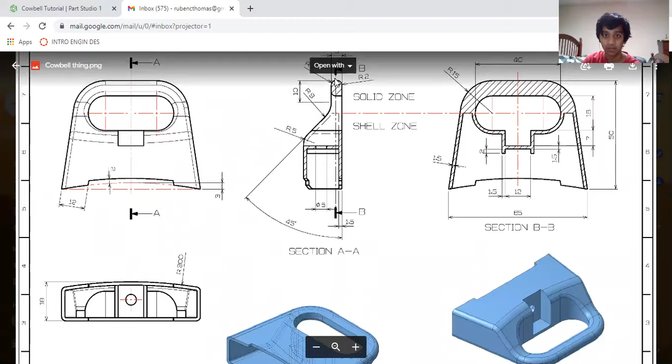To start off, we're going to be making a solid block out of this side profile over here. So if you open up Onshape, go to the right profile, we'll begin by sketching this out. I'm going to create a new sketch on the right plane and figure out what we know for now.

This height isn't yet defined, but we can start with what we do know. We have this 5 long top, this 10 long stretch down, so we can at least start with that. Let's create a 5 long stretch, 10 long stretch. Zoom out because this is big. I'm going to just constrain this for now by using just this point on the origin. So now we have that.

We're not going to worry about this little curve here because we'll do that at the end when we're filleting everything. Next, we have this curve that shows with the radius of 9.

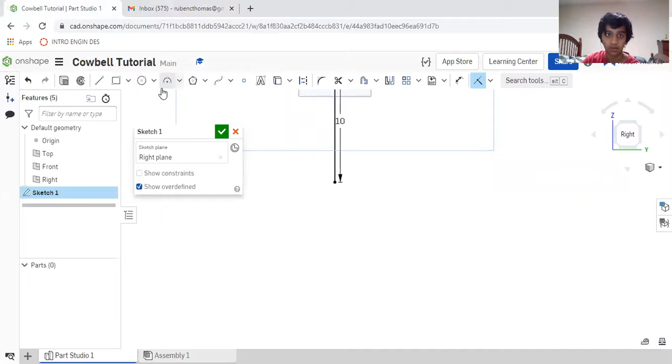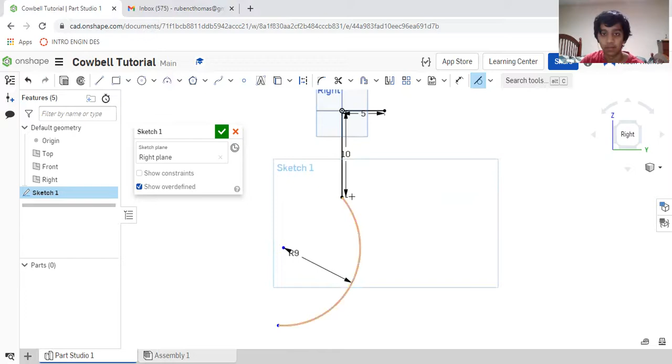We can start to figure that out by going to a curve using a center point arc. That's not what we do, just kidding. Using a 3-point arc, creating just a curve that we can click and define with radius 9 - was it 9? Yeah, 9. Then to continue constraining this, we can set this curve tangent to this.

And we have a curve. Now we just don't know where this endpoint is. After that curve, we have this radius 5 curve going down. But we're also going to ignore that for now because I found out that when you sketch this curve, it tends to break parts in the future steps. So we're just going to leave that at a harsh angle. So all we know is it will curve to be vertically down.

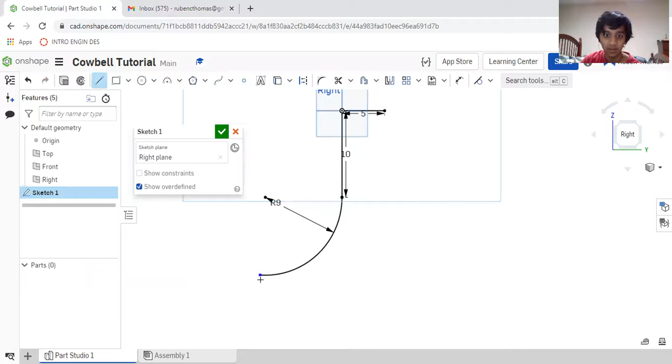Hold up, I completely forgot that there's a full-on slant over here. So we're going to ignore that for now.

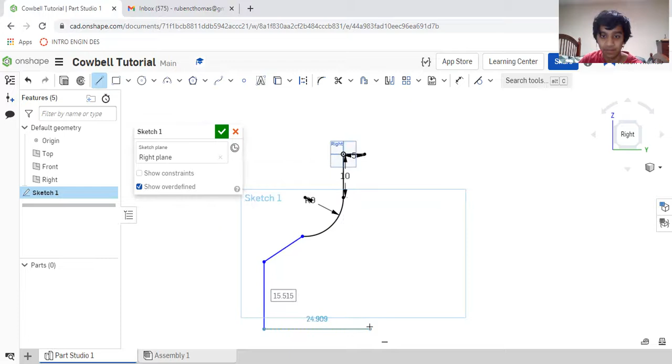So then we have a slant, then we have this, and then I'm just going to create the basic shape for right now. So this should be vertical. This obviously does not look like the side profile yet because we have to continue constraining parts.

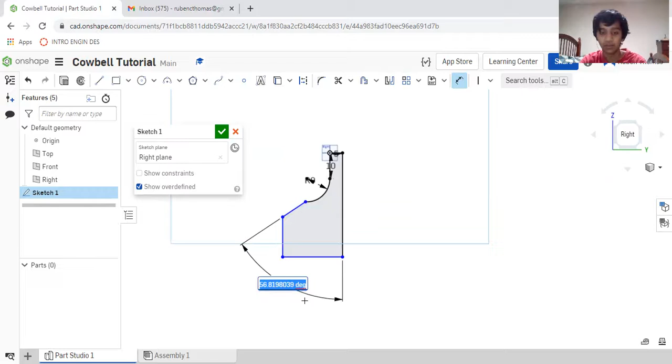So what else do we know? We know that this line is at a 45-degree angle from this line. So if you use the dimension tool between two lines that are slanted, you can create an angled constraint. So we have that for now. Again, we want to make these two tangent so it's smooth. Okay, it's looking more like how it should.

And now we just don't know some parts. We don't know how long this stretch is, don't know how long this stretch is, we don't know how long this stretch is over here. Also for this divot, we will be creating that in later steps, so you can ignore that for now.

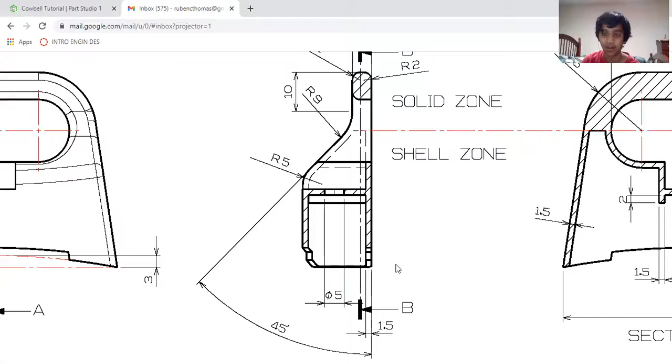Since we don't have all of our information for this little sketch over here, we can look at the other ones for more info. By looking at this one, we know the entire height of the cowbell is 50 units. And if we look at this one, we know the width of it is 18. So that 18 corresponds to this length, that 50 corresponds to this length. So if we go over here, and set this as 50, and set this as 18. As you can see, that has now constrained everything on the sketch.

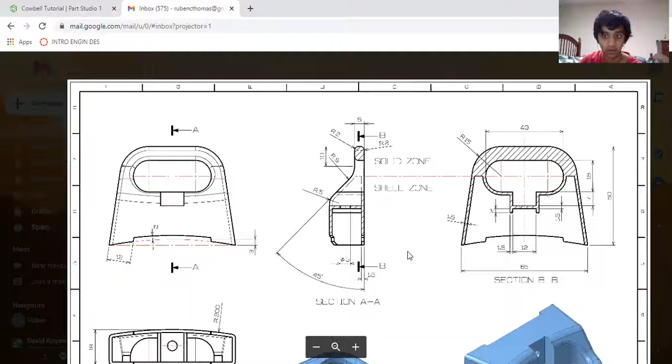That's good stuff. Okay, you can finish that sketch and move on to extruding this. So to figure out how much we want to extrude this by, go back to our drawing. Oh, I can zoom out. So over here, the entire width of this shape is going to be 65 units long, so we can just make this 65.

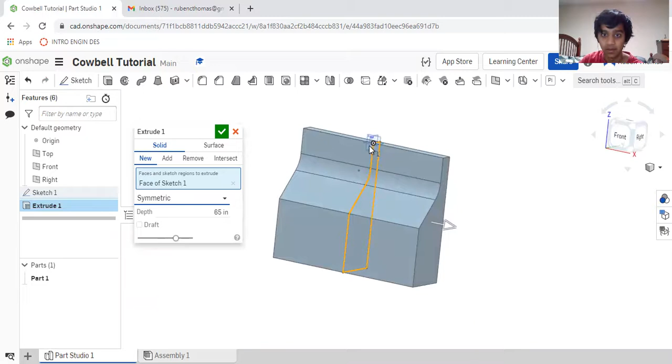Also, I don't know why, I just like to make it symmetric here because then the sketch ends up in the middle, as you can see. That can be used as a point of reference for other sketches because it'll be like a little line of symmetry going all the way down. It'll be easy to find your midpoint.

So yeah, now that we've extruded for 65 units, we can see we have this block that's starting to look like our shape, but obviously does not have nearly all the features we need. So next up, we're going to be making this the curve.

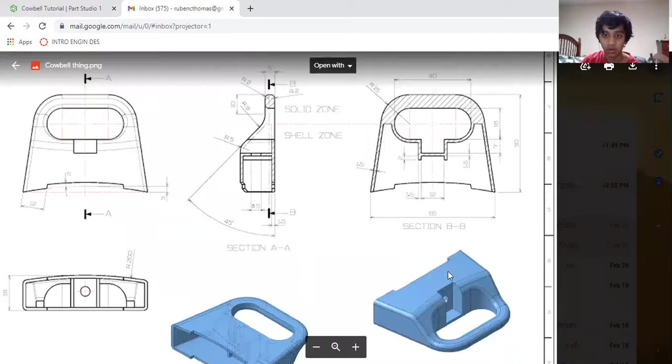So as you can see, the entire thing is slightly curved. Ours does not have that now. So we're going to do that by actually shaving off some of the excess material on the top to create that curve.

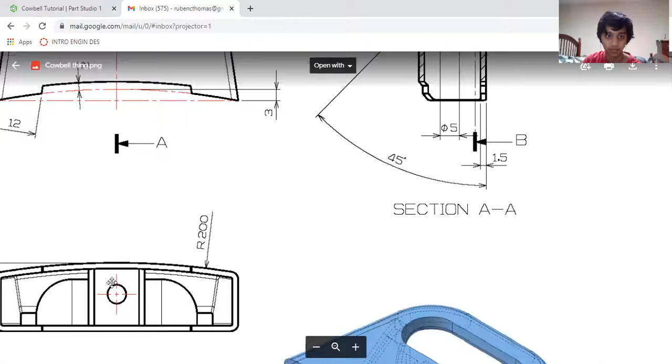So I'm going to create a new sketch and make it on the top of our shape here, the top view, so it's easier to see. And I'm going to be essentially sketching out this top curve. So I'm going to start by making a box around this entire shape.

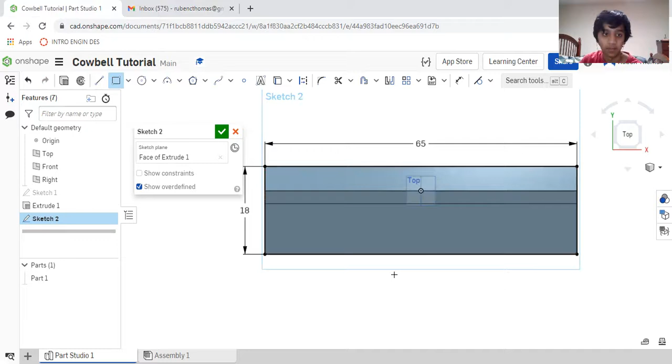What are our dimensions again? 65, 18. So this should be 65, this should be 18. And now we can see our entire thing is within this box. I'm actually also going to hide this part for now because it's not necessary.

Next, what else do we know? We know this is a radius of 200. So we can create our curve over here. We know it touches this side, and has a radius of 200.

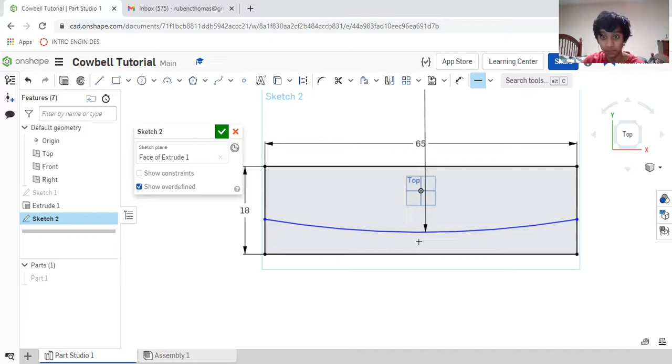We also want these points to be horizontal to each other. Lastly, we know that the furthest most point, the very end of the curve, is where the 18 is going to be. So we can make this curve tangent to this line, and that's how our curve is going to be. So that's all we have to do for now.

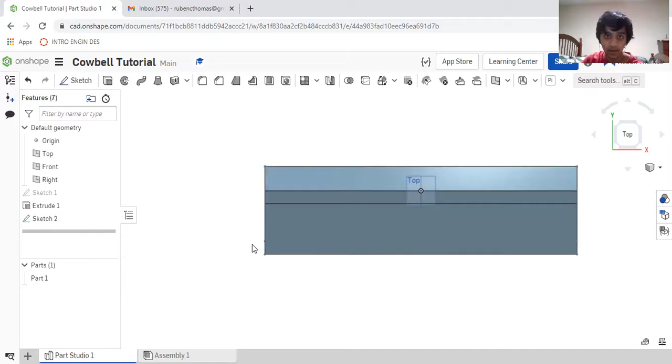So if you finish that sketch, unhide our part, and extrude, we can click on these little slivers we made, because we made that curve within the box, and go to remove. Now, if we just remove through all - oh yeah, also merge scope, click on the part. There we go. So when we remove through all, we cut off those little sections.

Our cowbell now has the curve. So now it's looking more and more like the cowbell. Good stuff. I'm going to finish that sketch.

Next, we want to make all the frontal features that we're seeing. Like we're going to make it so there's a hole for the handle. There's that little gap in the middle there, and also this bottom curve that we have going on here.

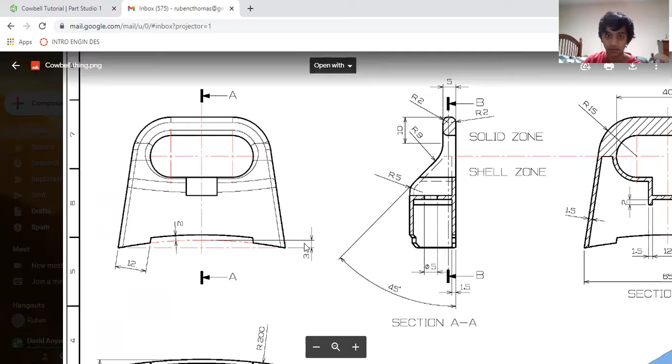So I'm going to go to the front, create a new sketch. Let's click somewhere on there. And yeah, what should we start with? Okay, so there's a good amount of info over here.

So we know that this curve, or actually hold up, this entire outside curve is going to have a radius of 15. So is this one. This length is 40. So there's a whole lot of stuff that isn't clearly defined, but when you just start out with what you can see and what you know, you'll eventually get there.

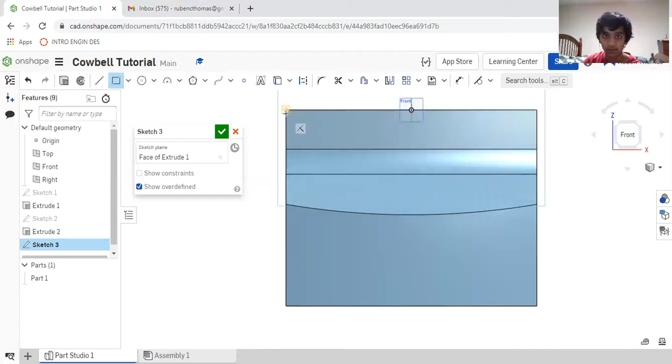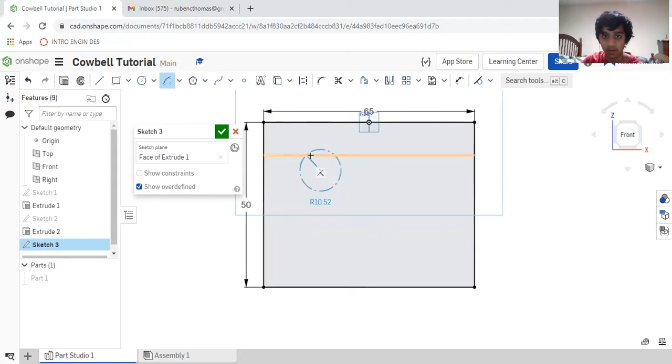Okay, so what we know is this one I'm going to use a center point arc. Okay, we know, maybe. Okay, this has a radius of 15. That looks big. 15. Okay, no, we're good.

This also will have a radius of 15. So since they're the same, we can just set them equal. And we know these are half circles.

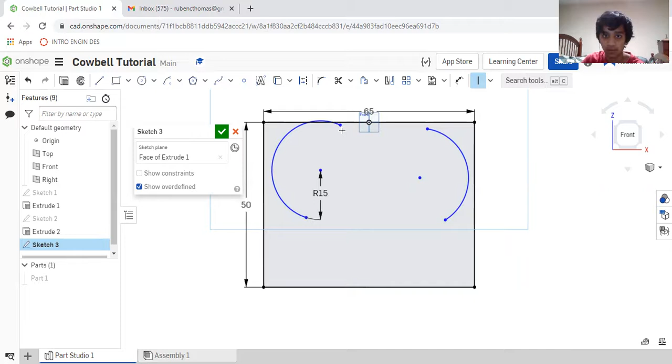So we want these 2 points to be vertical of each other. So you can use the vertical constraint key, which is V. Just click on these 2 points for both of them, and it will make them vertical. And also click on them on the center in one of them, so then the center is also in line. So now we have a nice half circle going on over here.

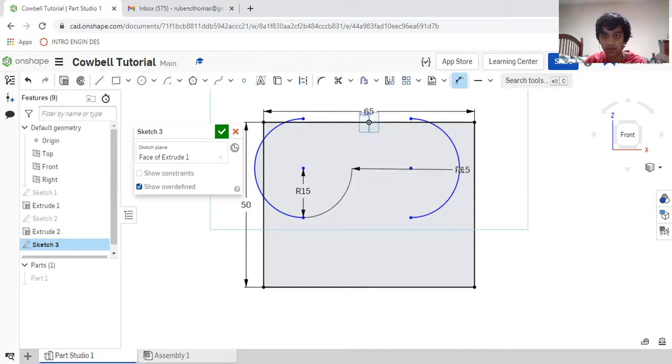What else do we know? The distance between the tips of the two circles is 40. Okay, so we also know that these circles are in line. So we can use the horizontal tool, which is the hotkey H, clicking on these two dots, and now they're in line. Then we can dimension the distance between these two to be 40.

Right, this looks - oh wait, not the dimension between these two. Sorry, ignore that. Because the 15 relates to this outer curve and this 40 relates to this inner curve.

Okay, so other than that, we want to figure out the radius of this inner curve here. And although there's not a radius marking like this one, we have this dimension of 16 that shows that the diameter of this curve is, well, 16. So from that, we can know that the radius is going to be 8.

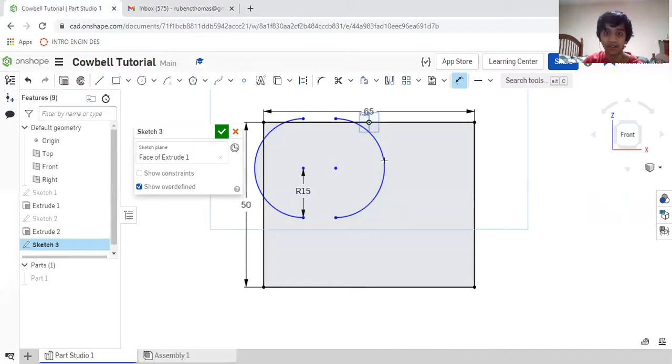So I'm going to spread these out again. Go back to the center point arc. It's going to have the same center because it's kind of concentric like that. So create another curve, dimension this one is 8.

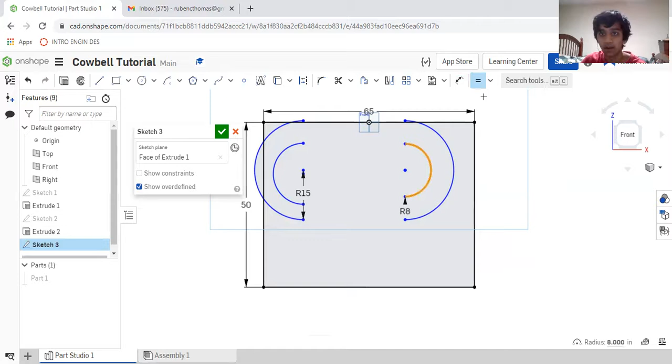Oh, the hotkey to use the equal constraint is E, by the way. So you can just tap E and click on the two things you want. Equal, then make these vertical.

Okay, and now these ones are 40 apart. There we go. Hold up. Oh, I didn't make the center of this.

Okay, so I'm going to use the coincident constraint, which is I, and make these two curves coincident. There we go, now it's all in line. Cool, so now we have this shape going. I don't know if it's fully constrained positionally yet, but we can do that a bit later.

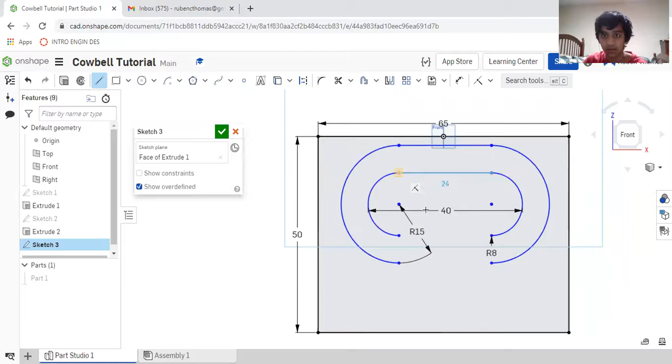Also, we know that the tops are connected, so we can just create a line going across over here. And then what else do we know? Okay, we know here at this curve, we don't know this distance yet, but we know that we have a 12 long line and then it goes 7 up.

So this one is 12, then it goes 7 up, and it connects to everything else. So again, we can just start off with what we know. You got a 12 long line, and it goes 7 up on this side. Also there's a line that's also 7, so you can set these equal to each other.

Okay, give me a second to make it so you can see the shape. And we know that all of this stuff is going to be directly in the middle of, it's going to be centered with this entire thing.

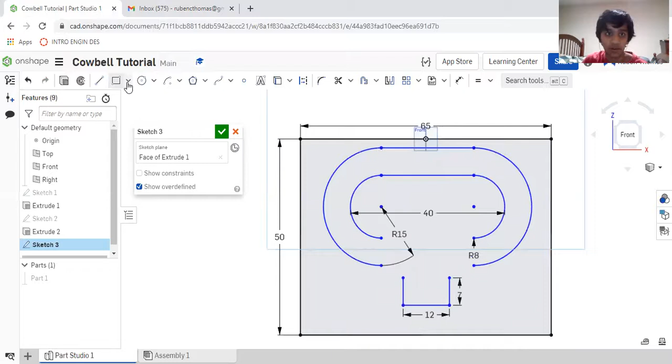So the way I like to center things usually is just create a point here. You can use the point tool and set it. You can kind of hover along this line until it creates a square. That's how you know you're making a midpoint, right?

And the way we have this set up is this origin is directly in the center of this box over here. If you want to double check, you can click on the point over the line, and you can see that.

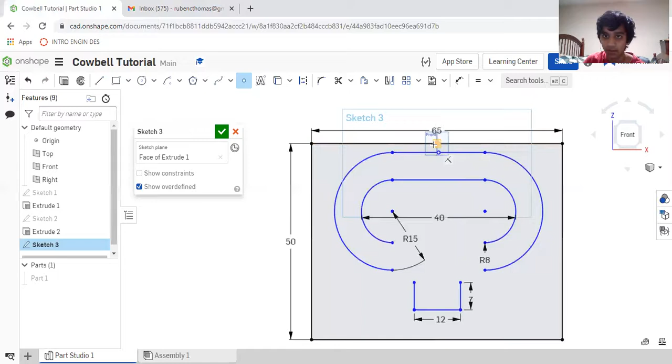Actually, here you can just click on the line here, go to the midpoint constraint, click on this dot, and click on this, and it just goes over the center. And so now we have this midpoint and this midpoint.

So the way you can center all of this is use the vertical key again, which is the hotkey V, and click that. And now this will be centered.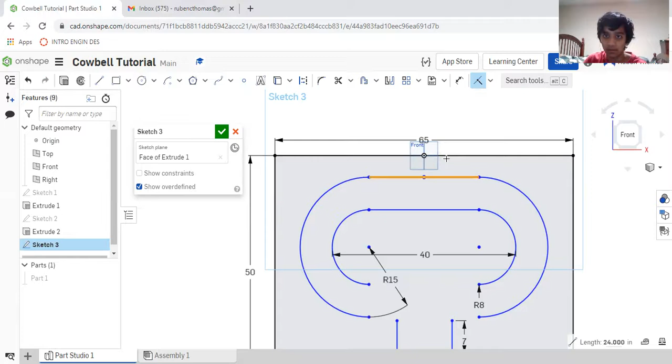We don't know how up and down. Actually, we do know, because we know that this little arch is the very top of this cowbell. So we can now just make this coincident with this. And now that's constrained. Okay.

And now we also know that this little U divot is also going to be in the center of this entire thing. So once again, I'm going to just make a point in the middle here, maybe.

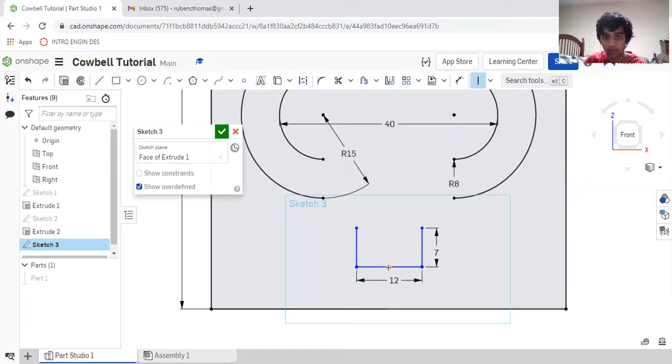Oh, there it is. Okay, let's set vertical to this, and there we go.

And so now we know that to the inner ring, there's just going to be a straight line connecting this part. So we can raise this up and create a line to this, a line to this, and make them horizontal. Now this is all constrained.

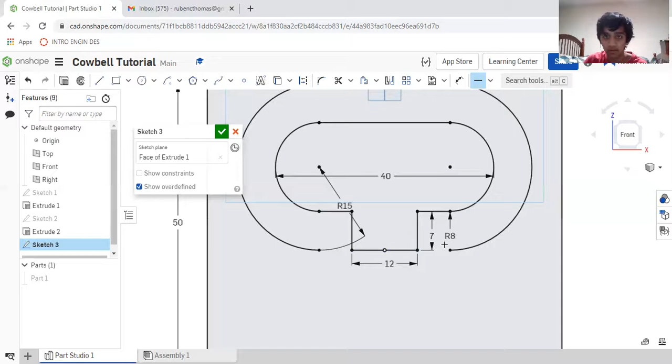Cool. Also, I just realized that this outer curve is not going to go all the way to here. As you can see, it kind of curves a bit under half, and then they'll go down. So I gotta change that actually.

I'm gonna just delete this vertical constraint, and... may have goofed a bit. Give me a second. Here, I'm gonna just delete this curve entirely. Actually, that's my bad. Here we go.

Center point arc again. Here, somewhere random. Here, radius 15. So these two equal. Okay, this is not constrained anymore.

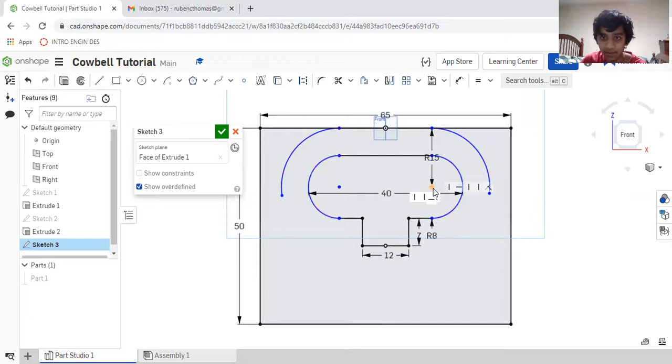That is because... why is that? Okay, also still want to make these two horizontal because they should be on the same level. Now when I drag this up and down, yeah, they should move together. Why is this not constrained though? That is my question.

Oh, I guess because when we connect it back, hopefully it'll work out. That's interesting. Okay, I'm gonna come back to that because I don't know what's happening there yet.

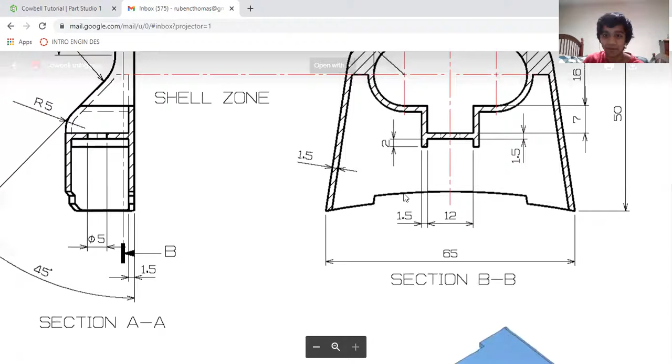But now we're gonna work on this bottom curvy part. So again, I'm gonna start with what we know. It's not a whole lot of dimensions going on here, but we do have some here.

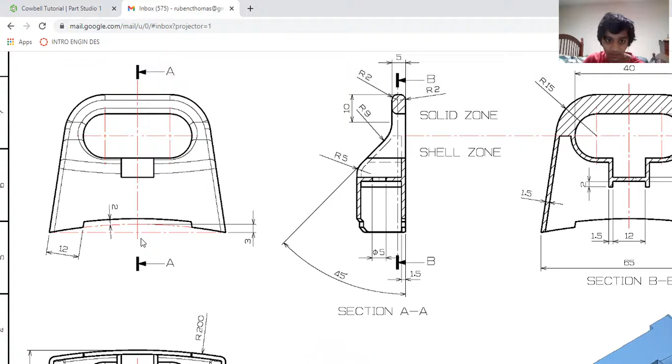So we know that this part is 12. The first arc has a 3 unit separation from the bottom, and the second arc has a 2 unit separation.

Let's go ahead and start with that. If we create a 3-point arc, we know that 2 of its points are going to go there, and it's going to be curved like that. And now we also know that the top of the arc and the base over here is going to have a distance of 3, which constrains that.

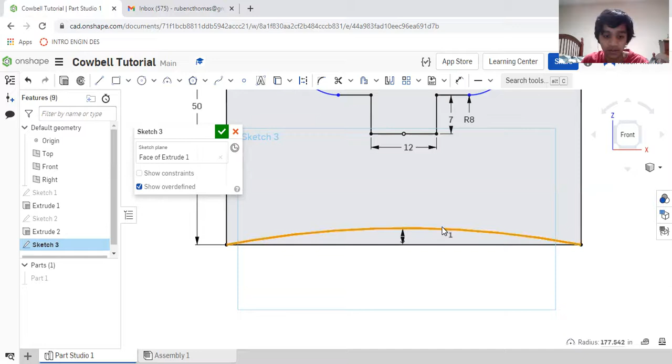But we don't want all of that arc, so we just want 12 of it. So I'm going to change this to a construction line and create another 3-point arc, making it follow this line.

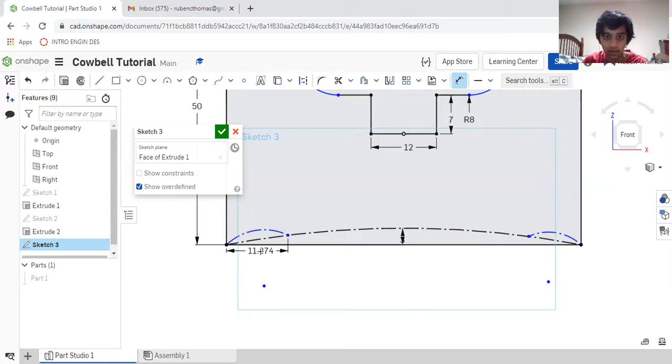I'm going to just create the lines for now. Look at that angle dimension. This should be 12. And this should follow this line.

Actually, first I'm going to make these not construction, because these are the lines we actually want. Then using the coincident key, I'm going to make sure that it follows that line. Now we can see that it goes up a bit and then has the curve again, this time 2 higher than the original curve.

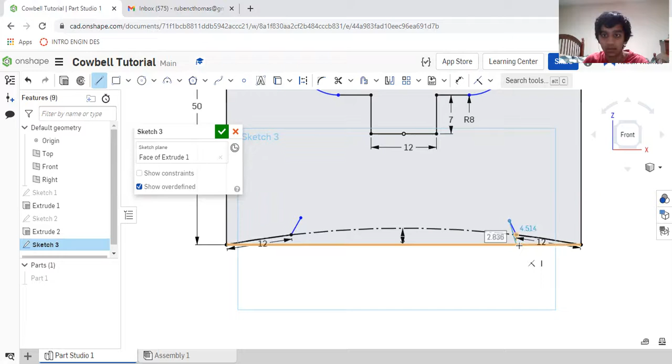So I'm going to create this little up part. You want these two to be equal to each other. And we also want these to be mirrored.

The way we're going to do that is I'm going to sketch a small vertical construction line from the center up. This does not have to be constrained. It's just a reference for the Onshape thing to find a line of symmetry.

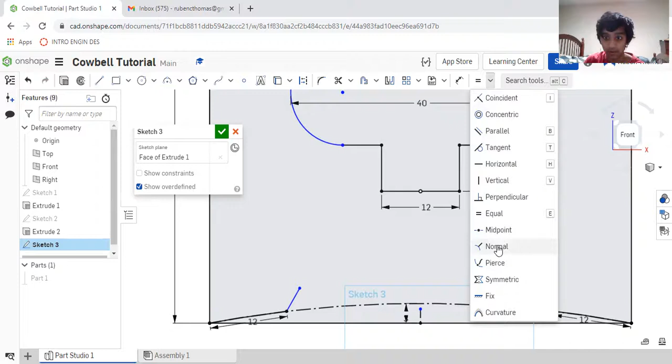And I'm going to go to mirror. Where is that? Hold up, why can't I find this? Symmetric, there we go. Click on those 2 points, this line, or not.

That's interesting. Okay, go back to symmetric. These 2 lines, saving this. No.

Okay, ignore that. We're just going to make the curve first. So if I go back to the 3-point arc, make this little arc here, and we know that this is 2 higher than this arc.

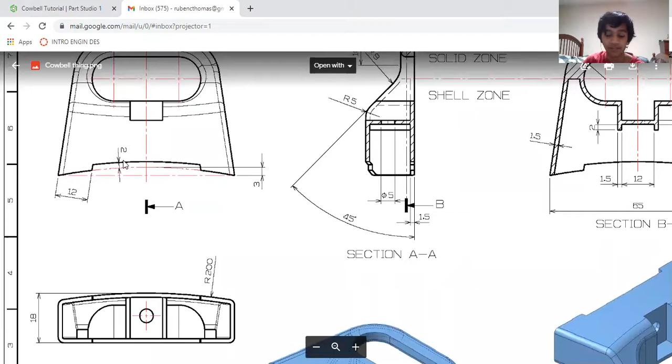This is a case where this arc technically isn't fully constrained. We don't know how long these little individual pegs are, so we can't really determine the curve or the radius of this arc. So I'm going to cheat a bit since they left it out.

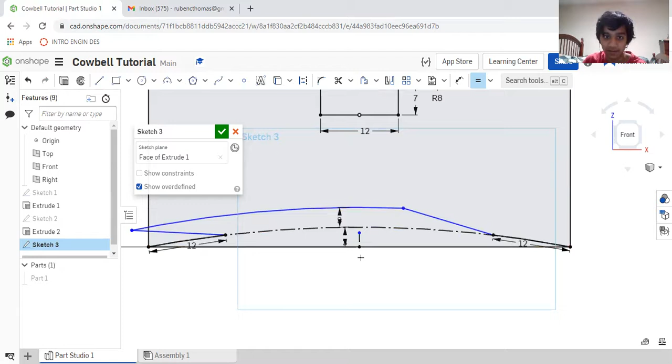We're just going to assume that this arc has the same radius as this one, so we can set these equal. Okay, that's it. And here's another tip: I can set this equal to this too. But this is why I kind of wanted to make it mirrored.

I have no idea what's happening here. Hold up, I will come back in 1 second. Okay, I'm back, sorry about that. I figured out all my problems.

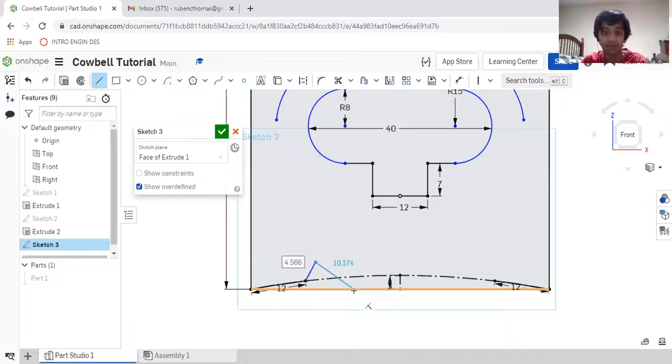So instead of using the symmetric constraint, because that was just not working, we're going to create one line and use the mirror tool, so we've got to select a mirror line. We're going to use this line we created before again, that's going to be our mirror line, and just select this line, and there we go. Now the symmetric is actually working, and they will be mirrors of each other.

So now I'm going to go ahead, no, not 3-point arc, make this curve again. Oh, there we go. Make it 2 higher than that curve. Okay, give me a second. There we go, and make this equal to that.

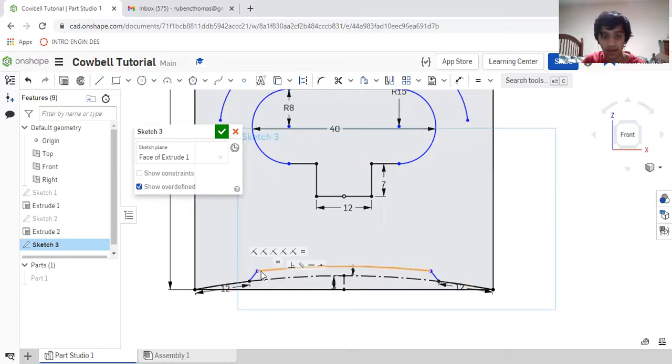Okay, now we just need to figure out how far in this goes. And also, I figured out what was wrong with this constraint. For some reason, we need to just pick a dot on this radius curve and set it vertical to this. That seems to fix everything, even though you couldn't move it before, but that works.

Okay, now moving on to figure out how tall this is.

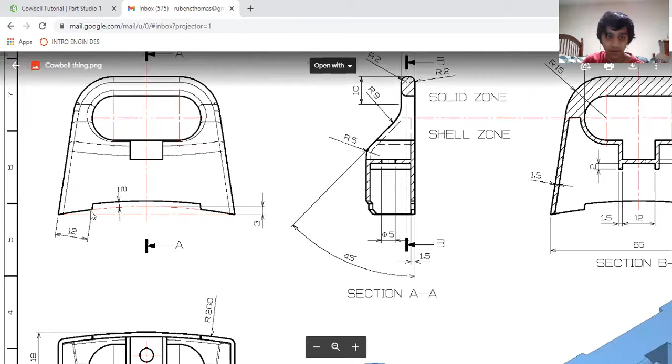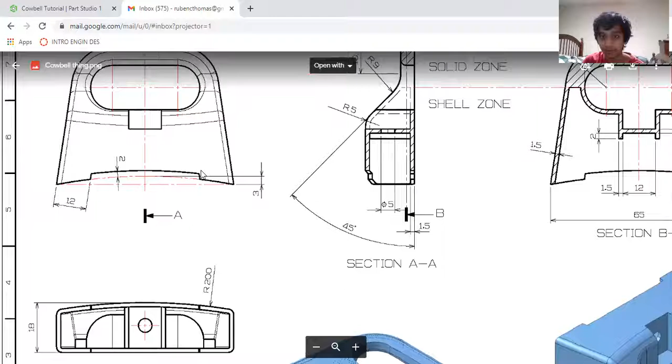All right, this one also does not have a dimension. That's right. So the way I did it is I set this line parallel to this line, because to be fair, it's not dimensioned in any of these, and that's kind of what looks best. So if you go here, you can use the parallel constraint over here and just set - oh wait, we don't have this line yet. That is a good point.

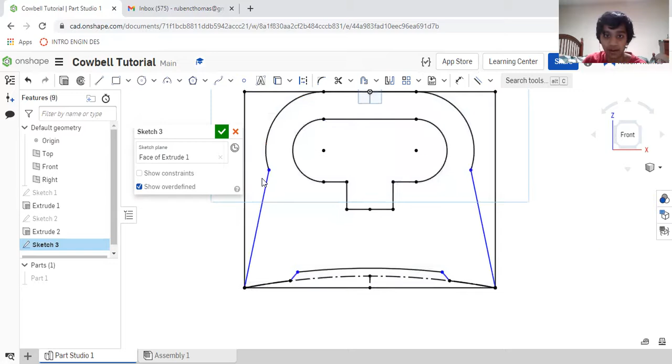So we know that this is connected to this like this, and this is connected to this like this, but we don't know how far down this goes yet. So if you go back here, we can see that the curve ends when it's directly in line with the rest of it, it's a quarter circle essentially. It ends right at this halfway part. You can tell by these center lines going all the way through.

So we can set this horizontal to this dot, since that's mirrored, that's all constrained. Now that we have this line, we can - oh wait, is that what I did? Yeah. Wait. No, that's not what I did. Sorry, this line just shows where the fill is coming in, but that's not what we're doing.

So instead, if we want to make a nice smooth curve, we're going to change this line to this curve. So now we have - there we go. Now we have the nice smooth transition. And now that we have this line, we can set this line parallel to this. Cool, and now we have our front shape.

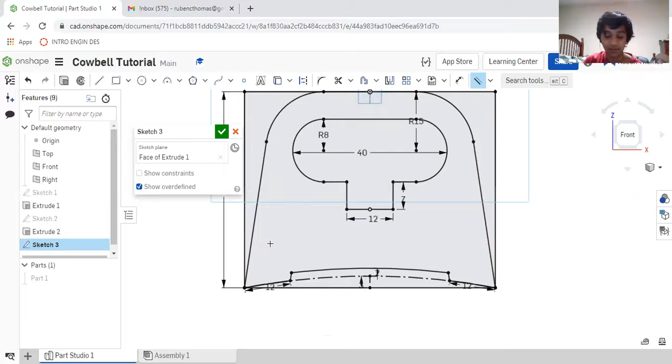It took a bit longer, but we're here. And so now that we have this sketch, we're going to use the same subtractive process that we used in the last step to get the curve.

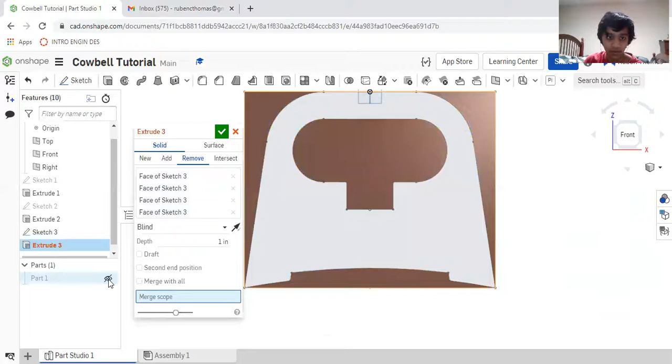So I'm going to go to extrude, and instead of clicking all the parts you created like you normally would, we're going to click on all of the parts outside of our shape, and in here. There we go, I'm going to go to remove so you can see our part again. Click on merge scope and click on the part, or just merge with all, that works too.

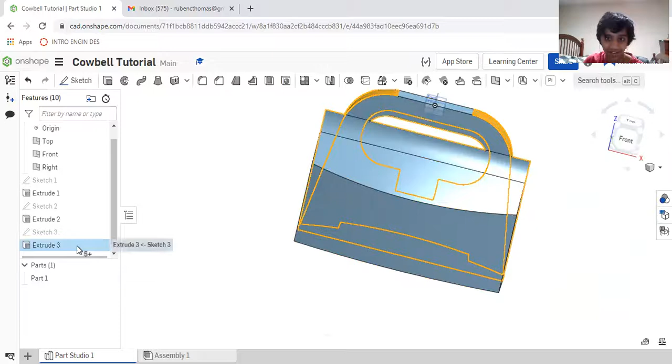And through all. There we go, I think. That was not through all. Give me a second. Other way. Oh, the sketch is in here. Okay, the sketch is kind of in between for some reason.

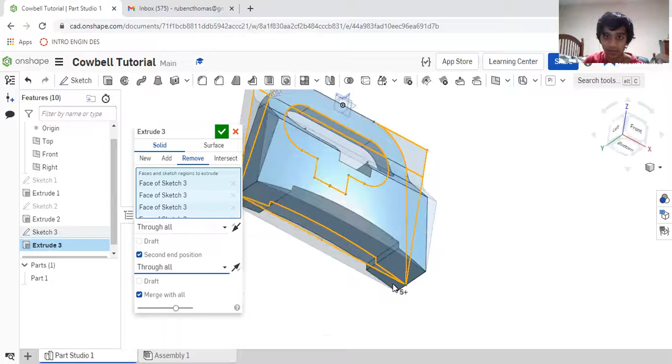This extrude - I'll just make a second end position and make that also through all. There we go, now it's cutting through both ways, and now it's looking like our shape even more. Now we got the cowbell shape, but it's got a bunch of harsh edges, which we'll fix later.

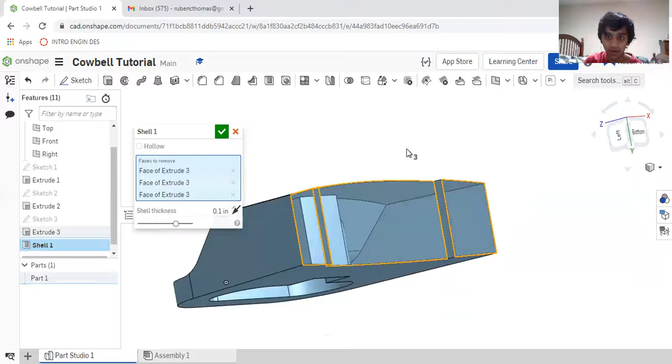For now, we're going to make the inside hollow using the shell. Where's that located again? Over here, this shell feature. So if you go here, we go to the bottom, click on all the bottom faces, and also be sure to get these little ones hanging out over here.

And we're going to set the shell thickness to, as you can see, it has a consistent thickness of 1.5 going all the way around. So we're going to set that to 1.5, and there we go. Now our cowbell is hollow, so it'll make a sound when you hit it. Always good.

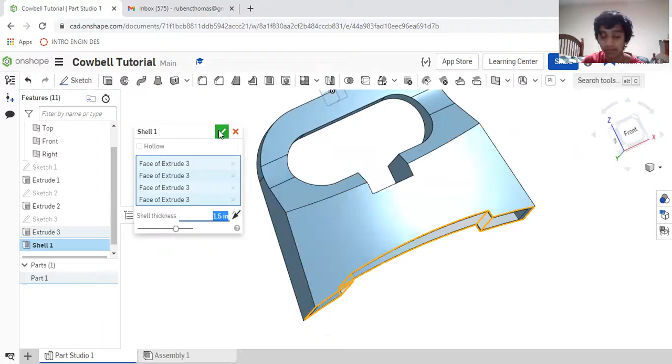Okay, obviously we're looking more and more like a cowbell. Next up, over here you can see that we have this hole that we still haven't made, and we have this little top - I'm not sure what to call it, this connector piece - that we don't have yet. And on the bottom, we have these two little divots, or kind of rails on this bottom part that we also don't have yet. So I'm going to start with

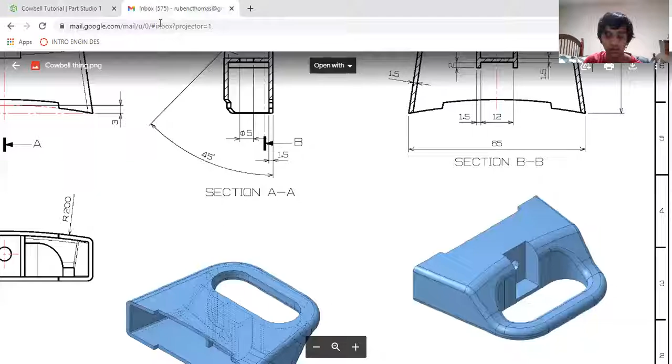this circle and this top line over here. So I'm going to create a new sketch over here, click on this, and yeah, this is a good enough angle. So for this little top line, which sketch shows that? This one kind of does. So as you can see, it's the same thickness as the rest of the walls.

We know that the walls are 1.5, so we can just create a rectangle that's touching that corner, and we know it goes all the way across, so that's good. So it touches that corner, and then just set this dimension to 1.5. There we go, that's going to be our sketch for a wall.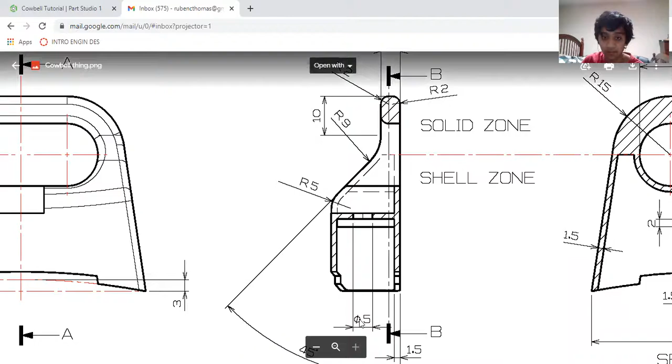And then for this hole - dang, I can't talk - here we see it has a diameter of 5, and as to where it's positioned, we can tell from this one, these lines indicate that it's in the center. So we know it's going to be centered within that little platform that they have going on over there.

So it's going to create a circle, diameter of 5. And now we want to center this. So the way I kind of like to do this sometimes is just use a bunch of lines. So, set that in the middle.

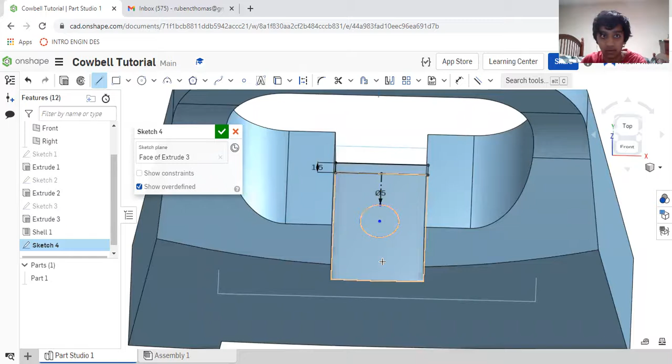Use another construction line for the midpoint vertically up. Let's set that to construction since it's not an actual line we need. Then set these two lines equal to each other. There we go, now that is the direct center of this little thingy. So we can close out of that sketch.

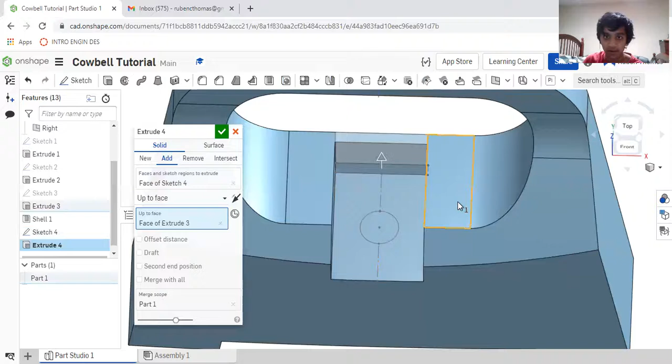I'm going to start with this little piece over here. We know that it extrudes up to the same level as this part, so instead of just blind and having to measure it, we can just click up to face, click on this face, and there we go. It matches the extrude to that level.

And then for the hole, I'm going to make the sketch visible again, not create a new sketch. Extrude this hole to remove, just make it... oh, wrong way. It's going to make it through all again. There we go, now we have our hole.

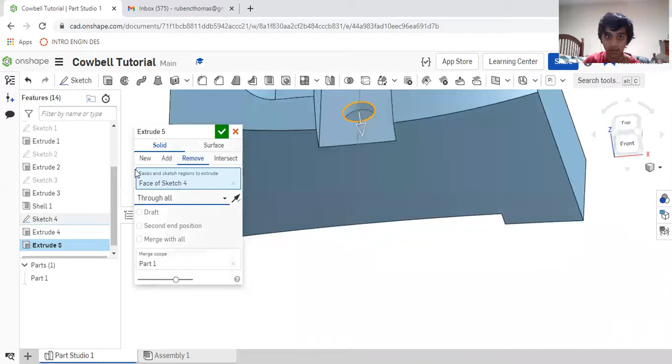Okay, now what we're missing is these two little rails on the side, kind of. As you can see, the rails are also 1.5 in thickness, so the same thickness as the walls. They just kind of go on the outside edge of this little bottom part, and they're 2 high.

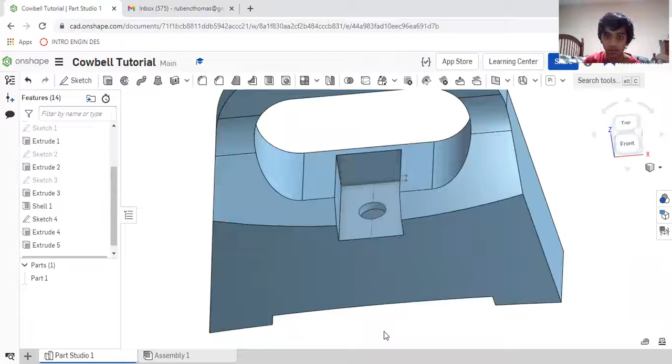So go to the bottom here, create another sketch. Just line it up and make some rectangles for now.

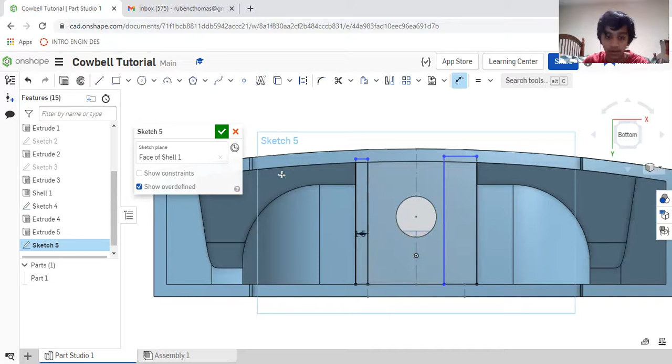This is 1.5, not 1.5, 1.5, and these are equal to each other. Since it's a curve, we don't really have to make the curve itself. We can just make this point touch the curve so that it's all within the curve, and we won't be seeing any of the edge. Make this point touch that curve too, then finish that sketch, extrude these two, and we know that it's extruded by 2 units. And there's that, so now we have those little rail things.

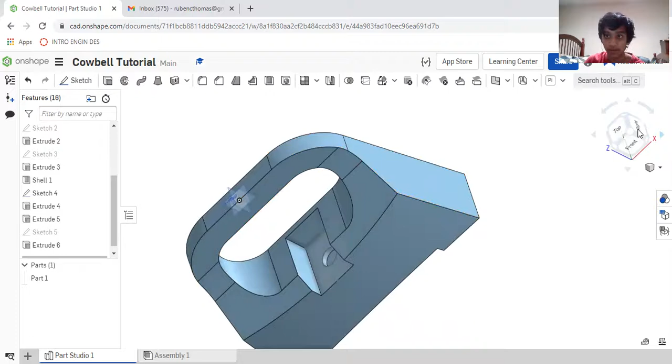Okay, finally we have this cowbell looking thing, but there's a bunch of sharp edges. We don't want that, you can cut your finger and it'll bleed, it's not gonna be very fun. So we're gonna fillet this entire thing.

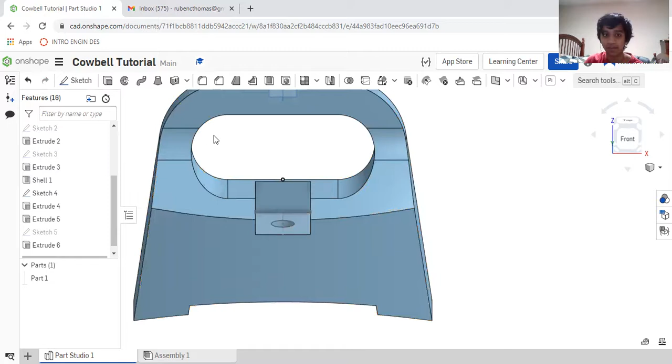So first, what we're gonna do for the fillet is go back to this 5 radius fillet of this center part here. The reason we did the sketch before is, as you can see, it's kind of curved now, and that ends up making it look right. If you made the curve in the sketch all the way in the beginning, it just kind of makes it look ugly. That wouldn't work out.

So if we go to this fillet tool over here, set this to 5, with a radius of 5, and just click on these 2 edges. There we go, we're starting at a curve.

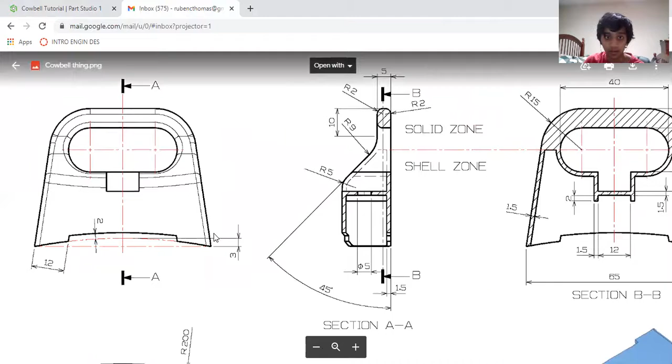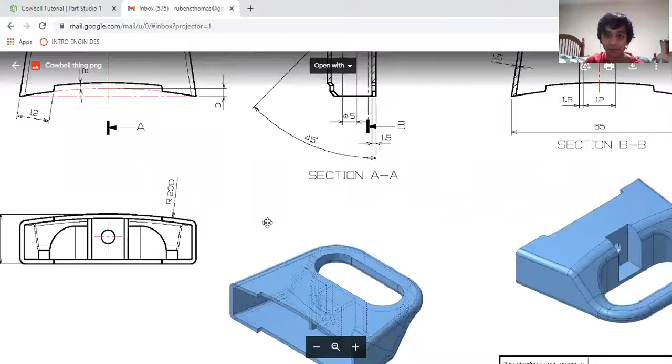For the rest over here, you can see that these have a radius of 2. Although these edge ones aren't really defined what their fillet is, we can safely assume it's 2, since it's the same size as all these top ones. Actually we can't just assume it's 2 because it is 2 - as you can see, this top one is 2, and it's that same fillet all the way down the edge, so we can tell it's 2.

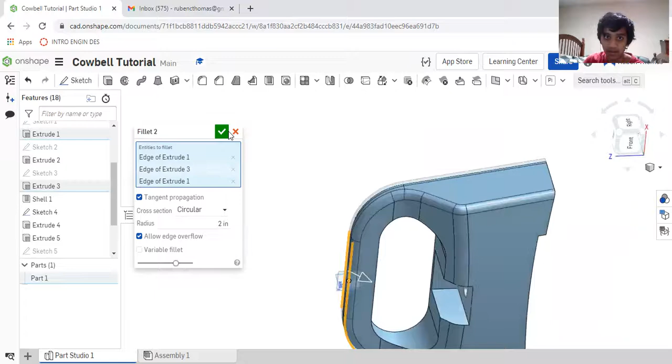So set that to 2 and click a lot. So this entire... oh, it did for me. Wow, so we got that entire top edge, this entire back edge, and yeah, I guess I didn't have to click a lot, but there we go. Now we have our very fancy...

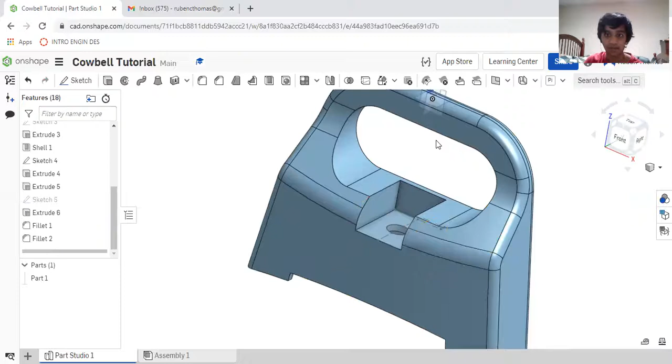Cowbell. It's not really a cowbell, honestly I don't know what this is supposed to be, but call it a cowbell. But yeah, it's quite the process. As you can see though, if you just take it step by step, even though it's kind of a complex shape, if you just start off with basic structures and chip your way down from there, you can make cool stuff like this. Although I don't know if you think this is cool. It's kind of, yeah, I don't know what this is. But there you go, there you have it.